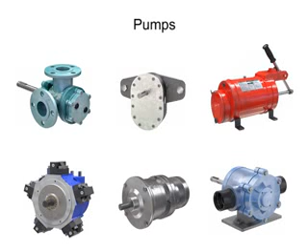Many different types of pumps exist to assist fluid movement in a variety of systems. An external gear pump uses two gears rotating against each other to provide fluid movement.

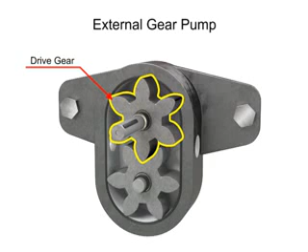One gear is driven by a motor connected to a shaft. This is called the drive gear because it is driven by a motor, and it in turn meshes with and drives the movement of the second gear.

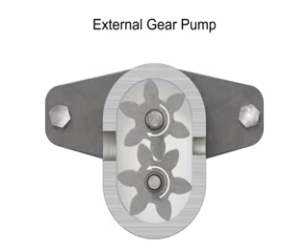As the gears rotate away from each other and come out of mesh, they create an expanding volume on the inlet side of the pump. This creates a vacuum at the inlet port, allowing fluid to flow into the pump. Then fluid flows into the cavities and is trapped by the gear teeth.

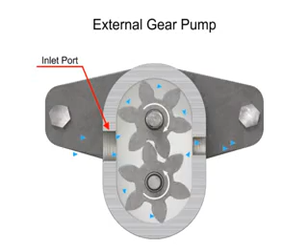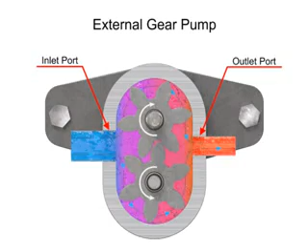As the gears rotate, a flow path is created around the outside of each one. Fluid trapped in the slots between teeth is carried around and discharged into the cavity with the outlet port. Meshing of the teeth in the center of the pump seals the outlet port from the inlet port. No fluid passes between the gears.

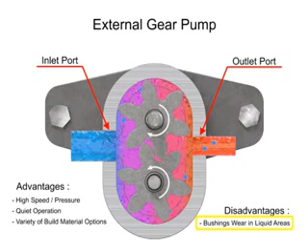The advantages of external gear pumps are their high speed and pressure, relatively quiet operation, and that their design accommodates a wide variety of materials. Disadvantages include bushings in the liquid area can become worn and that they have fixed end clearances.

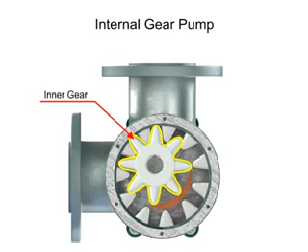Internal gear pumps are exceptionally versatile. This type of pump has one inner gear which is inside a second outer gear. The inner gear has a shaft driven by a motor and has teeth that protrude outward. The outer gear has teeth that protrude inward toward the center of the pump.

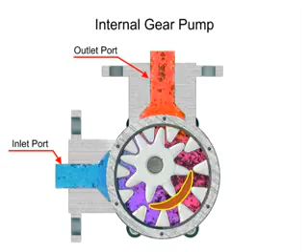As the inner gear rotates, it meshes with and moves the outer gear. Liquid is trapped in the gear spaces and carried from the inlet to the discharge. A stationary crescent-shaped divider separates the intake and discharge portions of the fluid.

Advantages of internal gear pumps are a smooth and almost pulseless flow, and slightly more horsepower for its size. Disadvantages are its higher cost, limited size range, low to moderate pressure ratings, and few sources of manufacture.

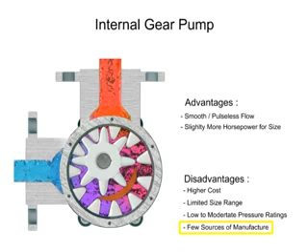A rotary vane pump is a positive displacement pump that consists of vanes mounted to a rotor. The vanes are on an off-center drive shaft. As the shaft rotates, the variable length vanes slide in and out to maintain contact with the pump housing. The tension in the vanes is maintained by either springs or hydraulic pressure.

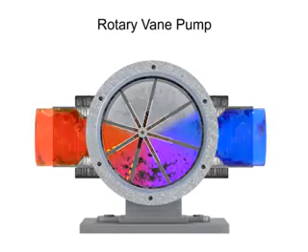As the vanes rotate, they create chambers of varying sizes within the pump. Fluid enters at the largest chamber. As the vanes rotate and retract, the chambers get smaller, forcing fluid to exit through the discharge port.

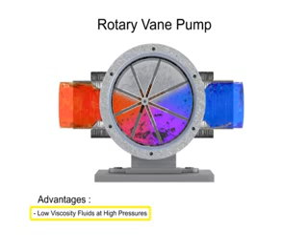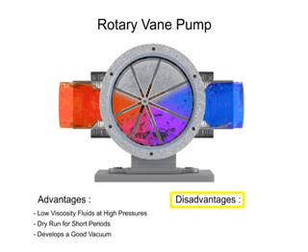The advantages of vane pumps are that they can handle low viscosity fluids at relatively higher pressures, can dry run for short periods, and develop a good vacuum. Their disadvantages include complexity and their unsuitability for both high pressure and high viscosity fluids.

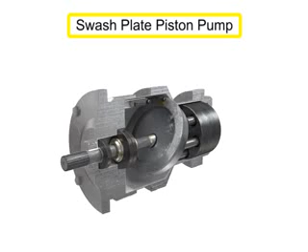Piston pumps come in many different forms. A swash plate is a device used to translate the motion of a rotating shaft into the reciprocating motion of a piston.

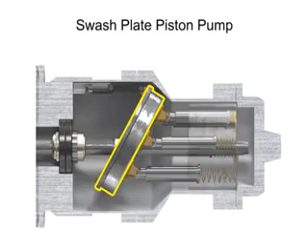Swash plate piston pumps have a rotating shaft connected to a cylinder block containing pistons, which are pressed against a stationary swash plate that sits at an angle to the cylinder. As the shaft rotates, the pistons move against the swash plate, causing them to reciprocate within the piston block.

The pistons create a vacuum that forces fluid in during half a revolution and expels fluid during the other half. On the intake stroke, a spring ensures the pistons pull back and maintain contact with the swash plate, causing fluid to fill the empty cavity left behind.

On the discharge stroke, the angle of the swash plate forces the pistons back inside the piston block and discharges the fluid. The greater the slant on the swash plate, the further the pump pistons move and the more fluid they transfer.

Piston pumps, in general, are manufactured with closer internal fits than other pumps. This means that internal slippage can be less so that they operate with reasonable efficiency at pressures both too high or too low for the operation of other pumps.

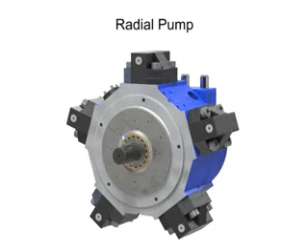Radial pumps are designed so the pistons stroke in a direction at right angles to the shaft. The pistons are arranged like wheel spokes around a cylinder block with an eccentric central cam mounted on a driveshaft.

As the shaft rotates, the cam moves towards the pistons, forcing them down into the cylinder block and discharging the fluid. As the cam moves away, springs help retract the piston and cause the intake stroke. Check valves ensure that fluid only enters the inlet ports and only exits the outlet ports.

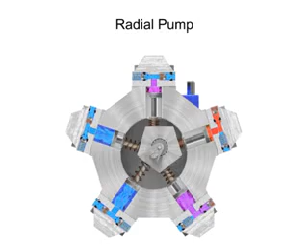Radial piston pumps have a low noise level, very high loads at low speeds, and high efficiency.

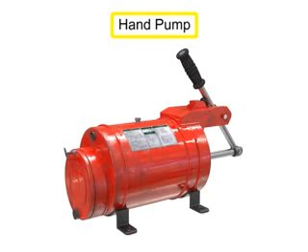Hand pumps are used when a source of power is not available or where the extra expense of a power pump isn't warranted. For example, they are used on shop presses and other portable equipment, serve as standby pumps, and serve as sources of emergency power.

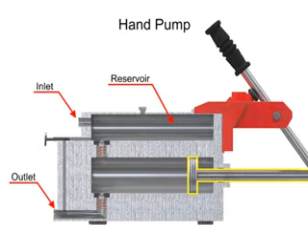Hand pumps are always of piston type and are usually constructed with a piston working between two check valves.

Double-acting hand pumps are more efficient, allowing fluid to both enter and discharge on both strokes of the piston. Moving the pump handle in either direction allows fluid to be drawn in from the reservoir and discharged via the outlet ports. Check valves in all locations prevent fluid backflow.